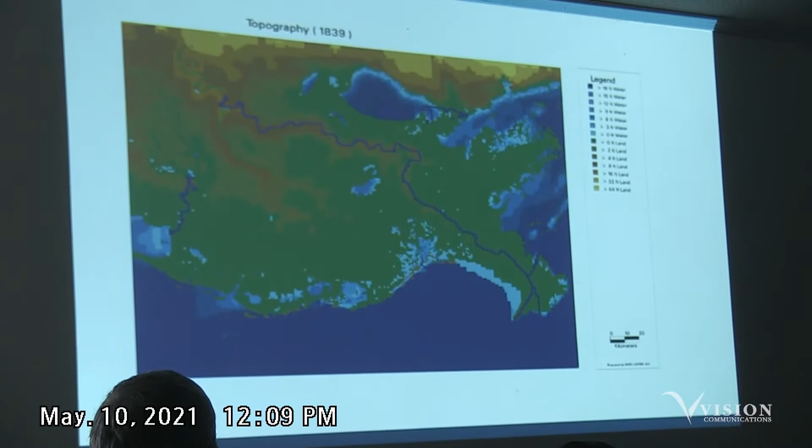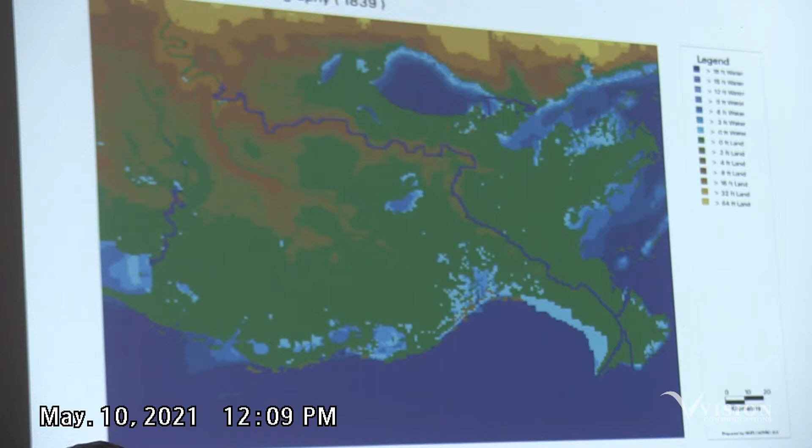Just to kind of refresh how bad things are, I got Joseph Hayter years ago to digitize a state map, and this was the 1839 state map, digitized like we digitize a map today. These are the days, 1839, when the river was still overflowing its banks a lot. You can see marsh almost all the way to Ile de Yan in Terrebonne Parish, solid marsh to the Timbalier Islands, and then almost solid marsh to the back of Grand Isle. And Plaquemines Parish was a real thick parish.

I mean, as bad as that looks, comparing the two, on the ground it's even worse. That's the kind of change. And look, just the change since 1950 is amazing. People, we're kind of used to it, that's why we don't notice how bad it is. But our land is changing. What it takes other places 1,000 years, we're getting into it in 100 years.

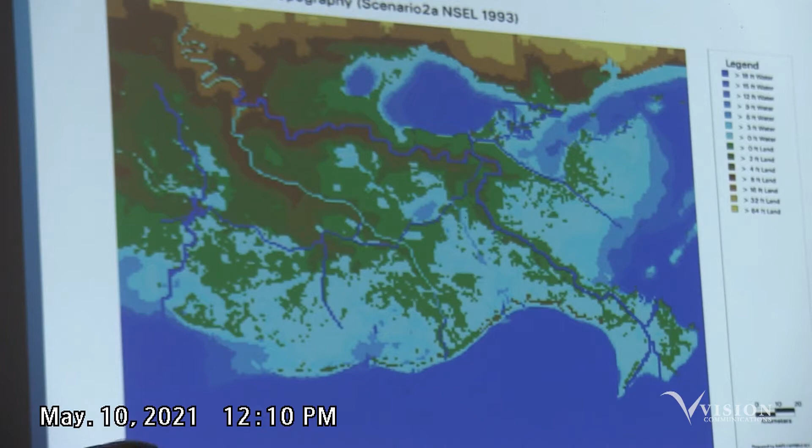And that's why the work that we do, and why we got to stay ahead and pay attention. The communities in South Louisiana, if they're gonna have a future, you have to will it. You gotta work at it. If you just are passive, your community doesn't survive. And you can look at the situation that Leeville's in and the comparison to where we are. Without a levee, we look like Leeville. If Leeville had a levee, it would look like us. So that's just a message that we gotta keep telling everybody.

And here's kind of closer reality, we used to be surrounded by marsh, and now the Gulf of Mexico is almost at our edge. That's why we got to keep on fighting, and we're fighting. But there's still some new land being built in the Atchafalaya Basin. Grand Lake used to be a lake, and now it's just the Atchafalaya River. Little Lake used to be little, and now it's Grand. And it shows the forces and what built South Louisiana, and why it continues to be a risk to us, and why we got to keep on working the way we work.

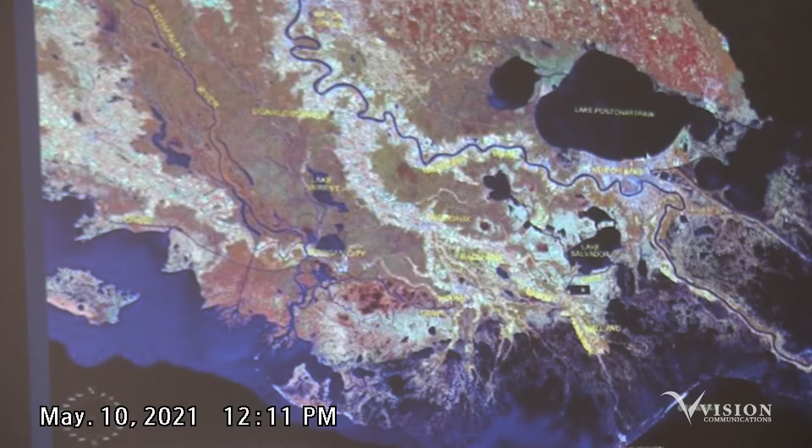And of course, maintaining our system, I've showed you this before, but the gates being back in place, full operational, lock again, and dependable. The problem's taken care of. We can grease it good. We know it's going to operate well.

Joe, Ben, any comments since we've had the gates in? Everything like it's supposed to be? Yeah, I mean, they've been going back and forth, adjusting the cables and making some slight adjustments, but it seems like everything's working correct. That's fine, good.

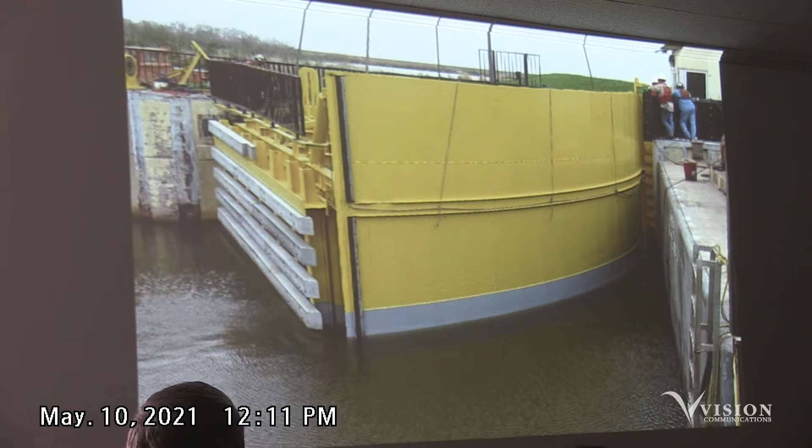It's just when you get those heavy rains, and again, it's one of those situations where it's better to be lucky than good. But again, we have a good system, but when you get more than you can handle, the rain is going to stack up. And again, I hope we don't see this for another 20 to 40 years.

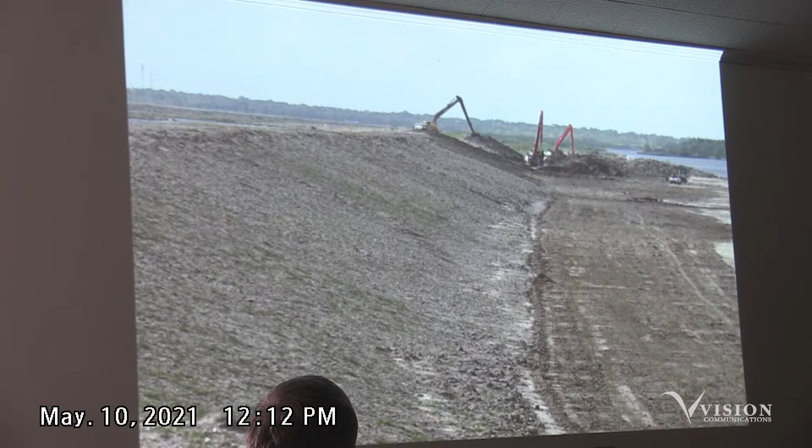Continue work on the levee. We're getting on the west side from Bully Camp toward the back area of Paul's Forum. We're getting that up to 18 feet. That's a tremendous improvement that's going on. Again, the marsh work that we had done, that used to be mostly open marsh. That was a trenasse that came all the way to the edge of the levee. We put a pipe down with slurry, a pipeline, about 200 yards from here, and actually had enough stuff drift over and close the trenasse.

And what you got, $300 million credit, Mitch? So far. Yeah, and so we get some more because it's so good. And then the key things kind of going on.

The biggest thing to really make a big difference for the whole area is to have a floodgate on the Intracoastal canal on the east side of our system, and tie in our system to the Morganza system. That way, if you get a storm, they'll shut that gate, and we'll have a lot less to worry about along the Intracoastal canal, a tremendous help to North Lafourche and Terrebonne from flooding on this side. Past the Intracoastal north, that goes into North Lafourche, and they handle that part. But over here, Terrebonne is handling the cost, with some help from North Lafourche.

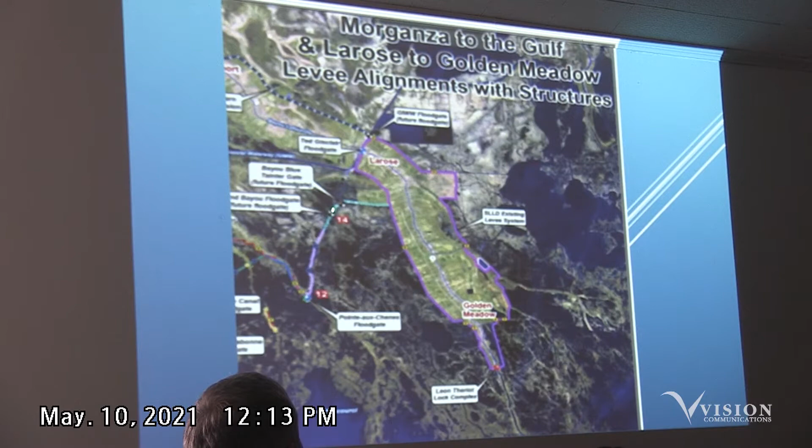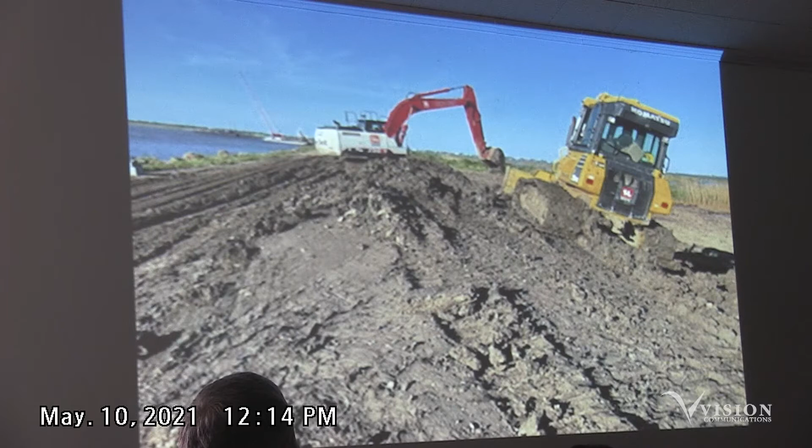Then here's the Pointe-aux-Chenes floodgate, the southernmost area connected to section K that we're building, with Terrebonne, North Lafourche and the state providing funding to get it done. Our mitigation levee was here, 4 to 5 feet, and now it's really turning into real levees. There's real progress going on there.

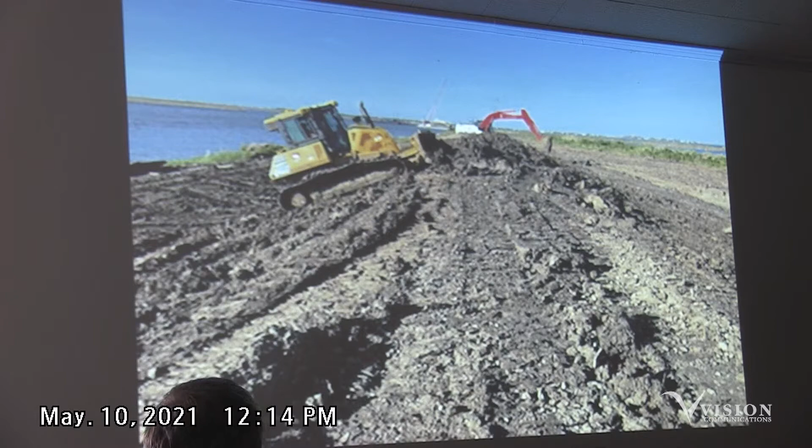What is it, 1.6 million cubic yards that we dug out the Grand Bayou? Yep. And pretty soon we'll talk about getting another 700,000 cubic yards. This levee is going to be substantial in not too long, but it's substantial now. The progress is taking place.

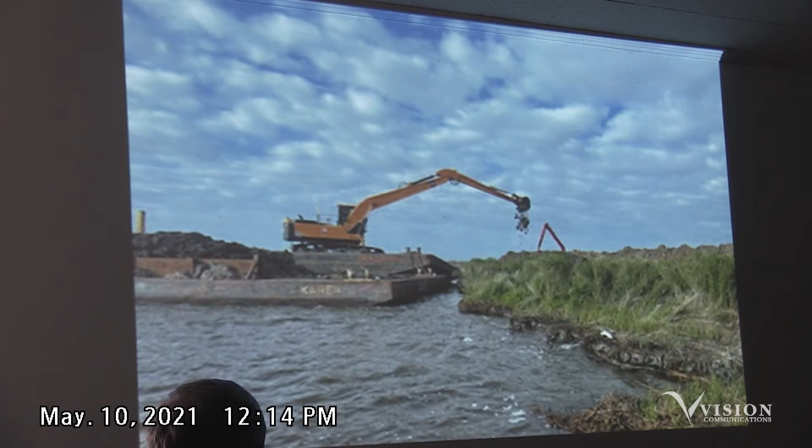This is some FEMA dirt. Some of the dirt was washed away by, which storm was it? Barry? Barry washed it away. FEMA's paying for it and bringing it in by barge, and some of it's being trucked in. But all of this is helping to get the low areas. There's a few low areas. A lot of the levees are up to 8 to 10 feet. But hitting the low areas is what matters, as always, you judge your protection on your lowest spot, because that's where the hole in the system is.

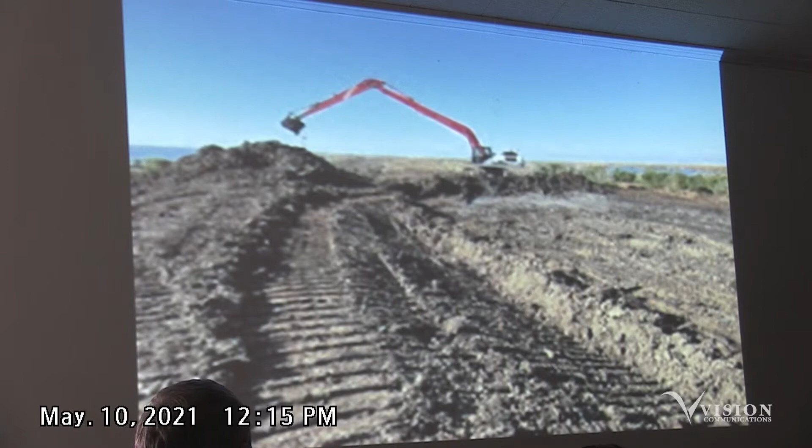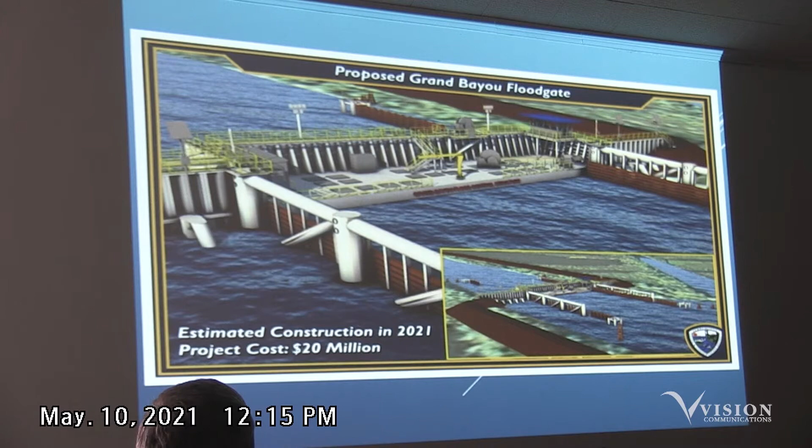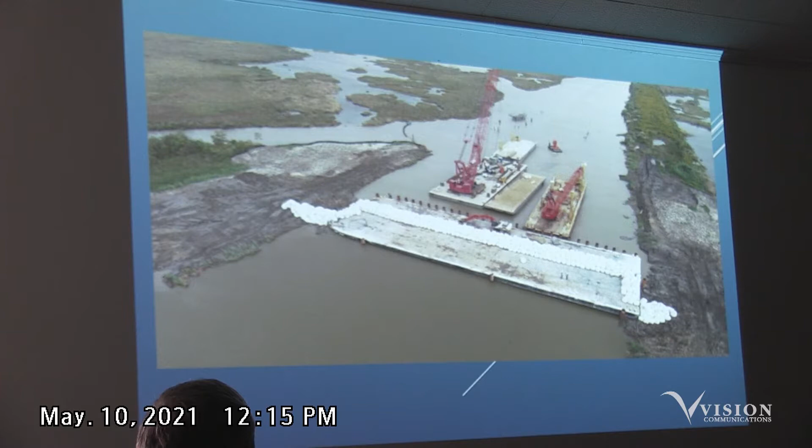They're taking care of the low spots, and there's going to be really good improvements for this year. Again, the Grand Bayou floodgate is on schedule to be in place and useful by August of this year, right when you start getting the heart of hurricane season. So with the improvement on K, and with the floodgate going in—this was a temporary structure that was there that helped keep some water out, and the more water coming, the more it kept out. But it did its job.

Now the work in Golden Meadow—this is the wall at the Golden Meadow pump station. It was at 13, and now it's getting close to completion at 17-foot elevation. That's a tremendous improvement in our flood protection here by going from 13 to 17. Our levees in Golden Meadow are between 17 and 18. So getting that gap closed, and even if it's slightly over top, it's a strong structure and can stand some overtopping. But getting to 17 would really reduce the odds of being overtopped.

And then, you look across Yankee Canal, how close the water is once you get past on the other side of our levee.

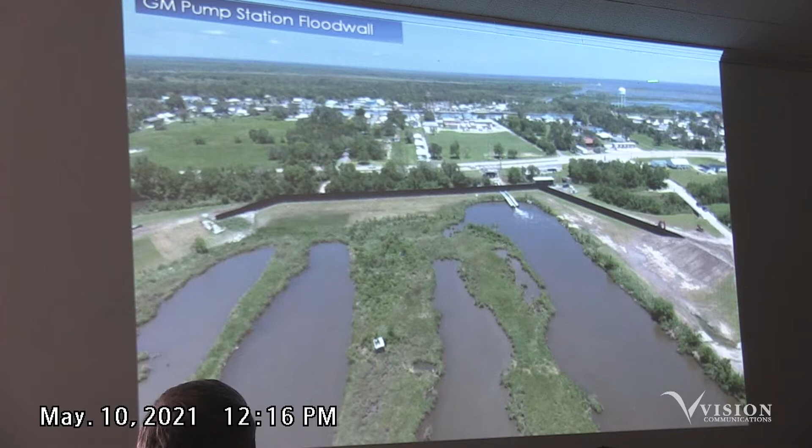Okay, here we look north, same wall, here's the Golden Meadow pump station. Remember, the 4-lane highway, you drive on it, you think you're on high and dry land. Well, it's dry, but it's not high. That roadway is below sea level in a lot of places in Golden Meadow. And then you see again, that don't look like 1950.

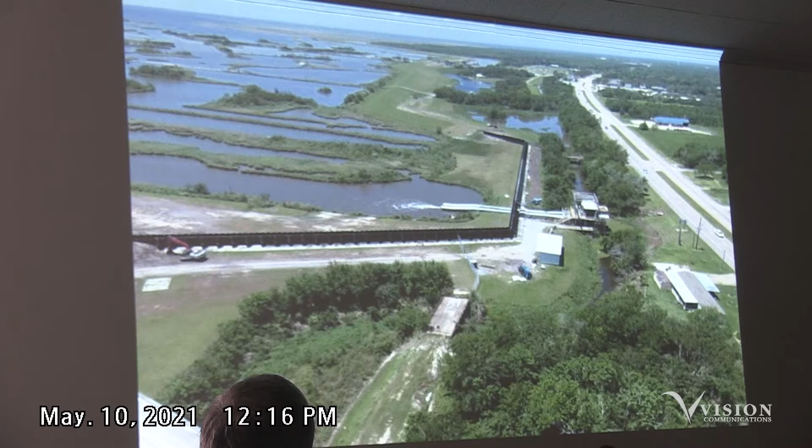You're still losing the marsh, and water gets closer to us. And then here we are looking west. There's a 4-lane looking west toward Terrebonne Parish, and Catfish Lake has broken out of its boundaries, and that's why we have to ensure that we keep these levees as high as we can and as strong as we can.

And now we're looking south. There's a 4-lane, there's the Golden Meadow pump station, the improved wall. The town maintains the water in the Borrow Canal at -9. We keep ours at -7. But that's at a -9, and over here's a +1. So every day you've got a 10-foot differential from the outside of the system to the inside of the system at Golden Meadow. And again, the road over here is not much above 1, if it is above 1.

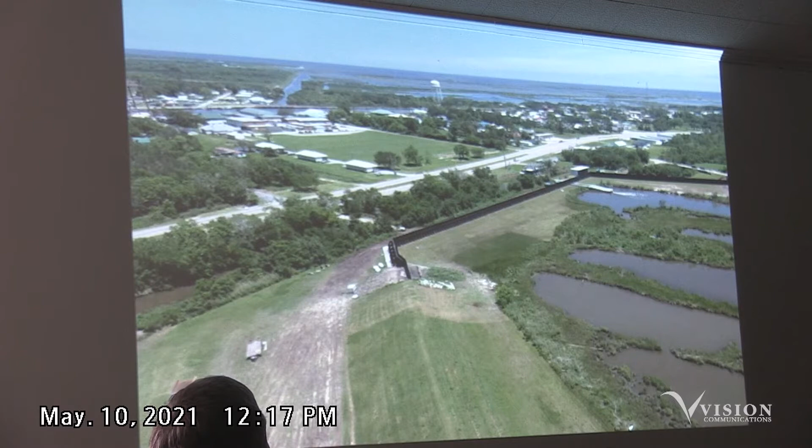There's a different view looking southwest, again, to that big open area on the 308 side when you get past Yankee Canal.

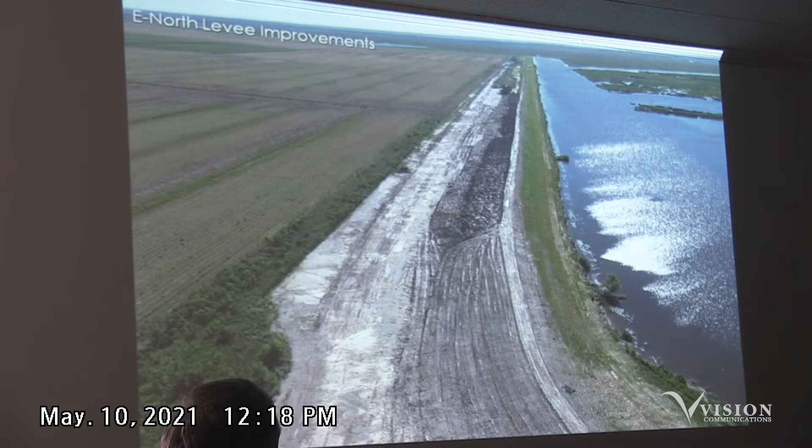Here's the work on E-North. We've talked to the state, and they've allowed us to enclose more of E-North and raise the levee to about 14.5 feet. We had dropped below 13, and so we're bringing it back up. This is working out real well.

Here's Superior Dock. We were supposed to stop here, but because the cost is working out well and we have some state money through GOMESA, we're going to continue to the corner and try to get all the way to the boat launch. If we do that, we can really improve the flood protection in this area a lot, which protects the whole system.

The land here is at -9 inside the farm. There are places down to -9, and we're getting this up to about 14.5 foot elevation. There's Superior Dock, and we've been delivering the dirt here to this corner, and then we'll proceed to the other corner.

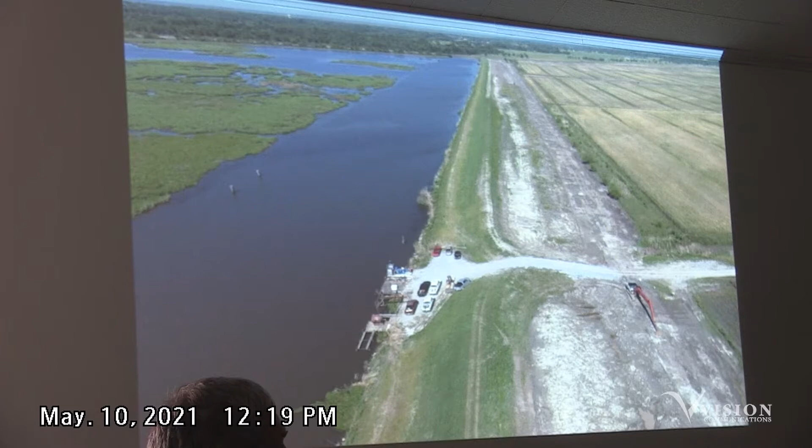Again, Superior Dock looking west now, and this is the corner that meets with East-South. This is Clovelly, and East-South goes from Clovelly to Breton Canal. Dirt was placed, and our machines are helping shape it into a levee and bring it up to 14.5 feet.

This is not good when you have an acute angle. During a hurricane, I believe it was Rita, the water was 3 feet higher in this corner compared to when you got away from the corner. You can see the debris line kind of go up. So we've always tried to build this up 3 feet higher than the surrounding levees in this area.

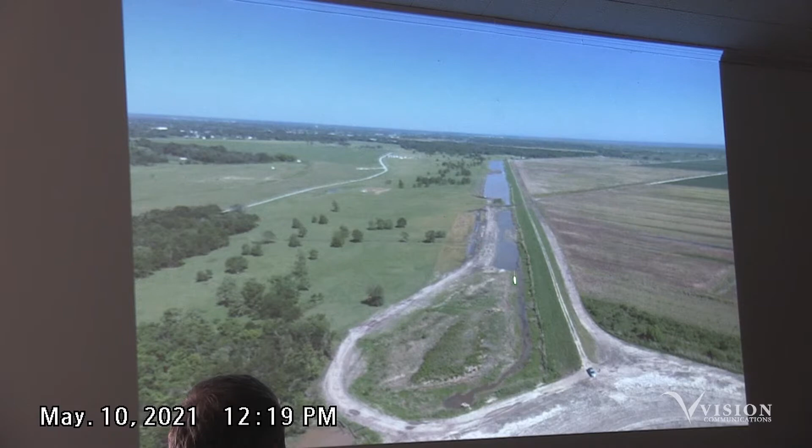Here's the pit that was donated by the Scully people. They allowed us to expand their canal so they can fit out, and that's where we're getting the dirt for the project. This is East-South, Scully and Clovelly going toward Breton Canal.

This had dropped below 13 feet. I mentioned 13 feet because that's the level the levee has to be for us to get the benefits of our flood insurance, so we're making sure to maintain above that level.

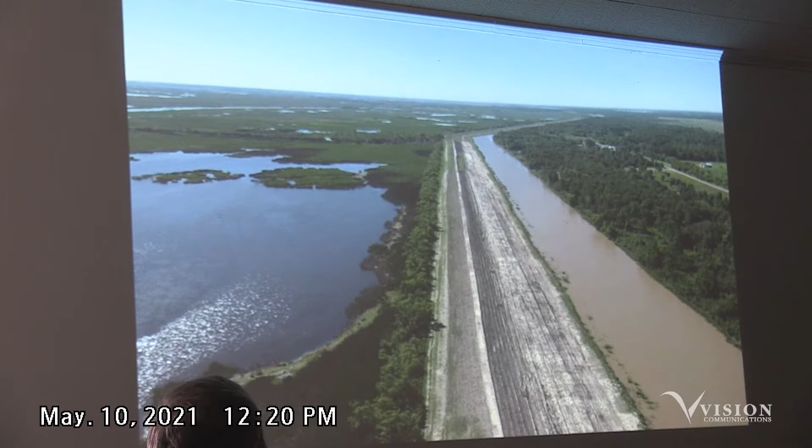And that's that angle I'm talking about. We had actually approached the Corps and said, look guys, how about we just jump across from this point, somewhere, and connect over here at Superior Dock? Then you don't have this acute angle at all. The Corps at that time didn't do it. Now after Katrina, they don't let these angles take place. But as I said, it's one of the cases where to be obtuse is actually to improve your situation rather than to be acute.

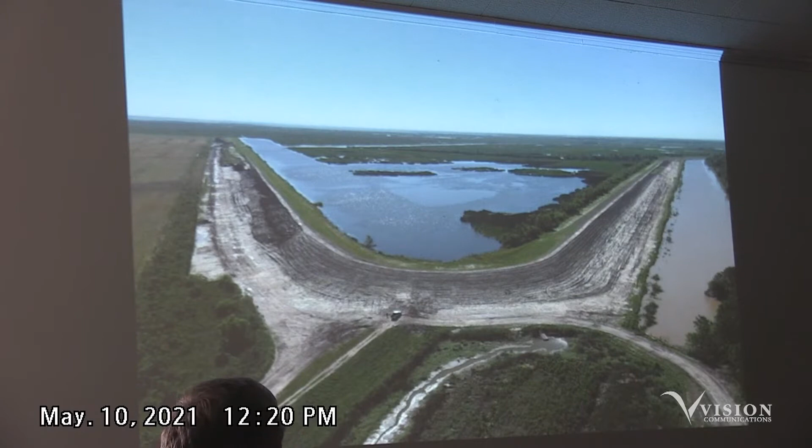On the west side, this is section F. We had parts of this levee which was 13 feet. This is from Scully all the way to Delta Farms Road. Some of this has subsided below 13 feet, so we're bringing that back up to about 14.5.

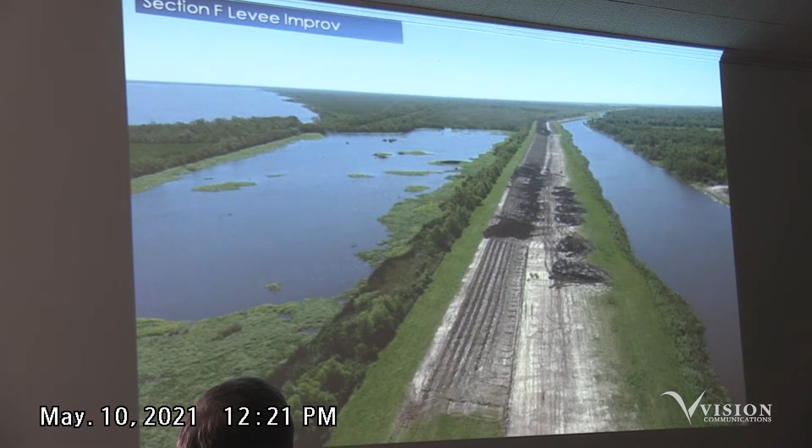They're trucking in this job. In this area, we have some good fresh marsh and not having the erosion problem that we have on the lower area and also on the west side. This is progressing pretty good.

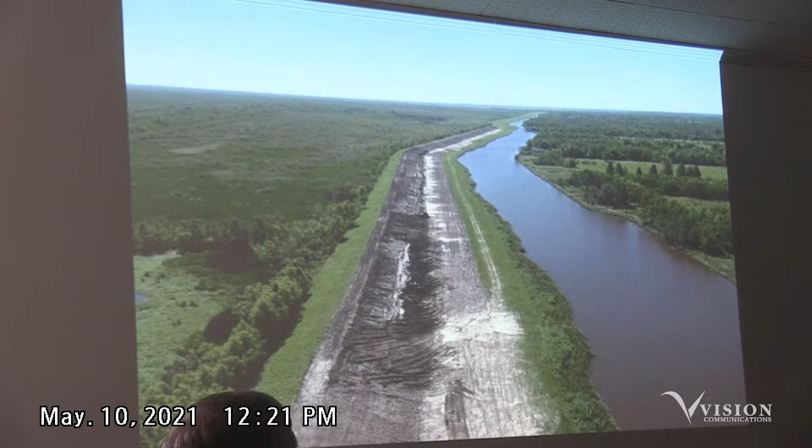When do we think we have this finished? Sometime next year. Early January, you think? Sometime after the first of the year, yeah. After the first, okay. But again, it's a big building.

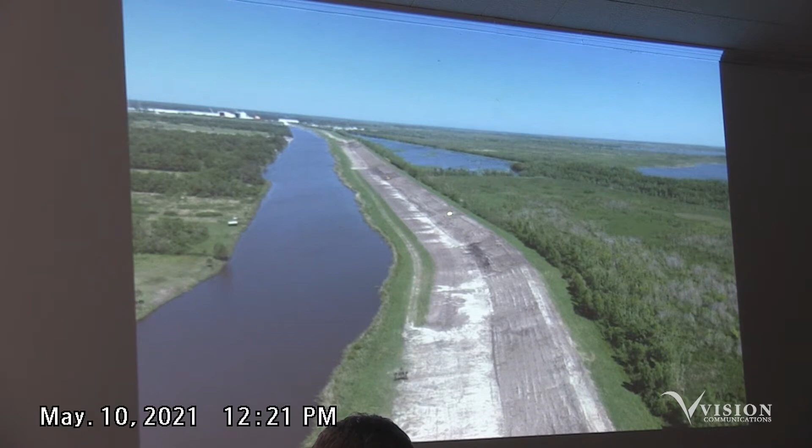Here we are looking north toward Delta Farms Road, and again, getting the elevation up to about 14.5.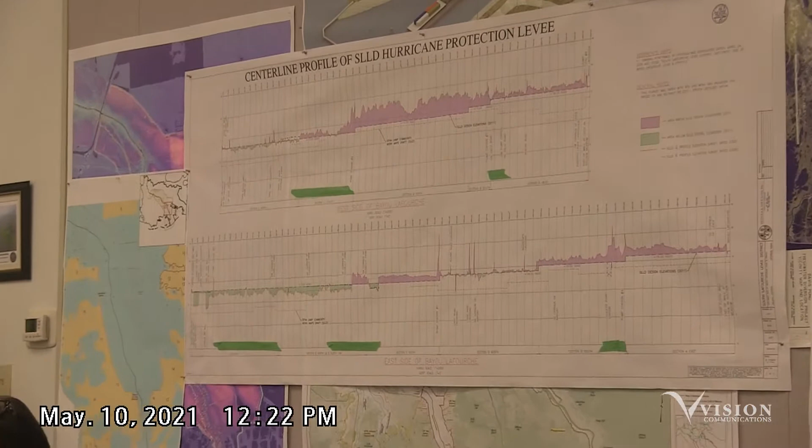We're taking care of a lot of areas - if you look up on this graph here, I just put these kind of rough areas in green. All of these areas are being worked on right now to raise those levels up. So there's a lot of linear feet being elevated still, and we're going to keep doing that into the next 2-3 years.

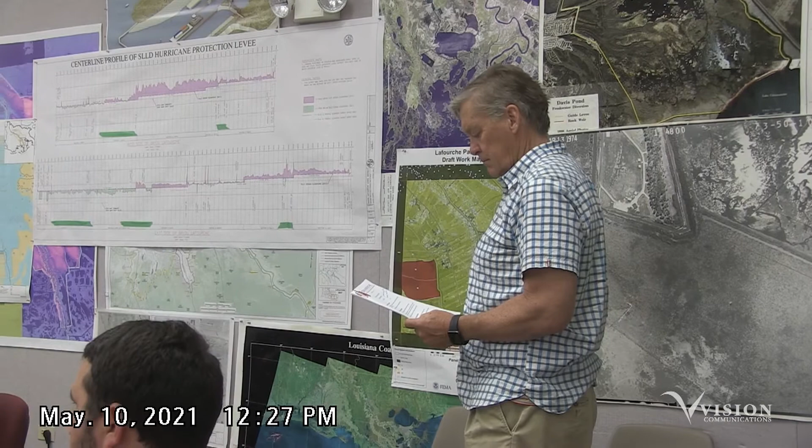He has pay application number 12 on the agenda in the amount of $32,459.37, and we do recommend you approve that. Okay, you have a recommendation of engineers to pay request number 12 in that amount for Grand Isle Shipyard. Your wishes, gentlemen. Moved by Monty, second by Rich. Any discussion? All in favor, signify by saying aye. Aye. Opposed, no.

On D-South levee improvements, SBL is the contractor. We do have a clear lien certificate, which clears out the job. The job is complete. We have change order number 2, which is the balancing of final contract quantities, a deduction of $315,920.39, and an additional 140 days of contract time to bring him up to when he actually finished this part of the job. We do recommend you approve that.

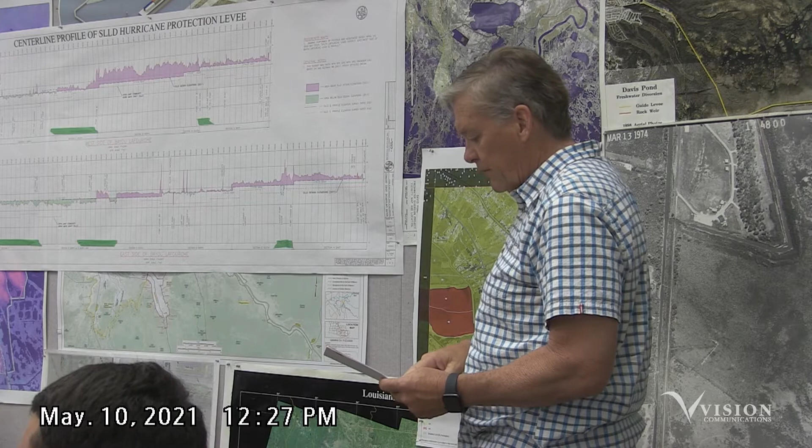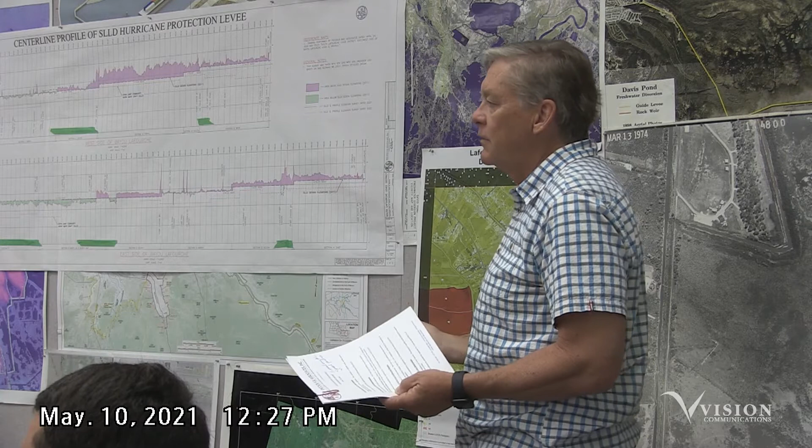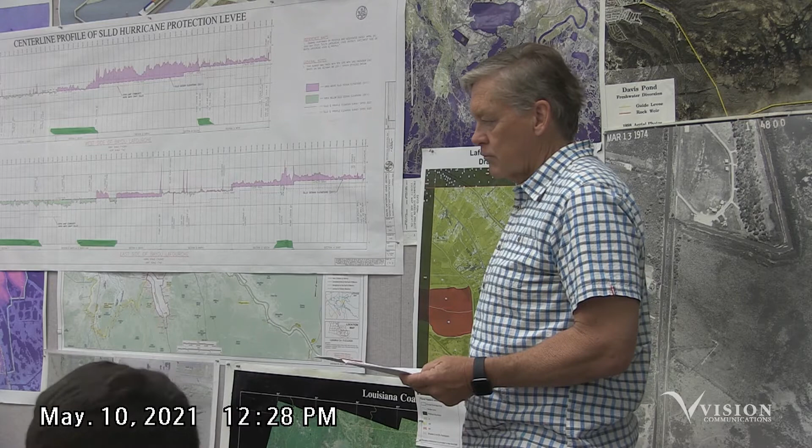Also, I think the attorney has a separate agreement that the levee district and SBL came to. I don't know if y'all want to take that up now. Yeah, this is the mutual release and settlement agreement. Ray has not completed it, but we would like for the board to give Ronald the right, upon his approval, to get that done so we don't have to wait till the next board meeting. Y'all okay with that? Okay, gentlemen, you've heard a recommendation by the engineers and our general manager.

We paid pay request number 13 in the amount of $13,329.05, and signed the final agreement, including change order number 2. Moved by Monty, seconded by Mac. Any discussion? All in favor, signify by saying aye. Opposed, no. Motion carries.

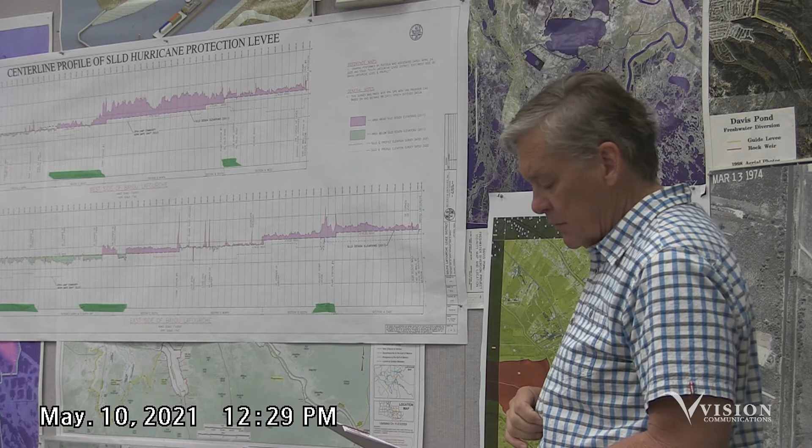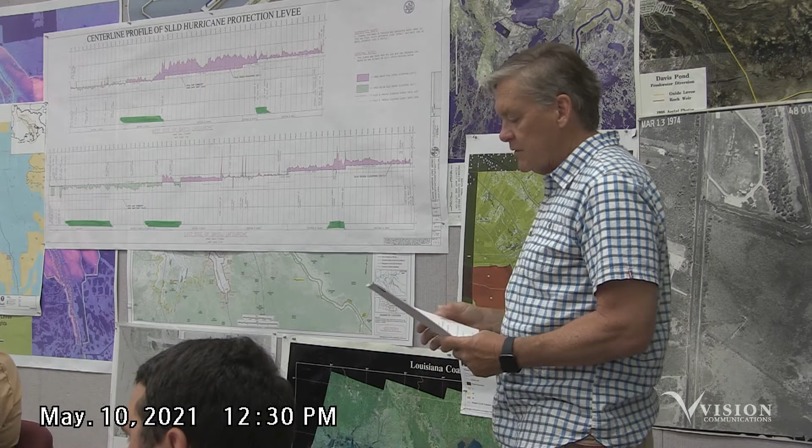On section F, that project runs from the Clovelly Levee all the way to Delta Farms Road. The contractor is Onshore Materials. This is an off-site borrow — he's taking material out of a pit he bought and hauling it onto the levee section to elevate it. He's making decent progress; even when the weather's bad, he's hauling as much as he can. Pay application number 3 is on the agenda in the amount of $205,721.10. We recommend you approve that.

Change order number 1 and pay request number 3. Change order number 1 is for $189,089.23 with 25 additional working days. That's to add material to the two sections that are seeping, elevating the berm in those areas that Wendell talked about in the last meeting. So we're adding material to his contract to take care of those two areas.

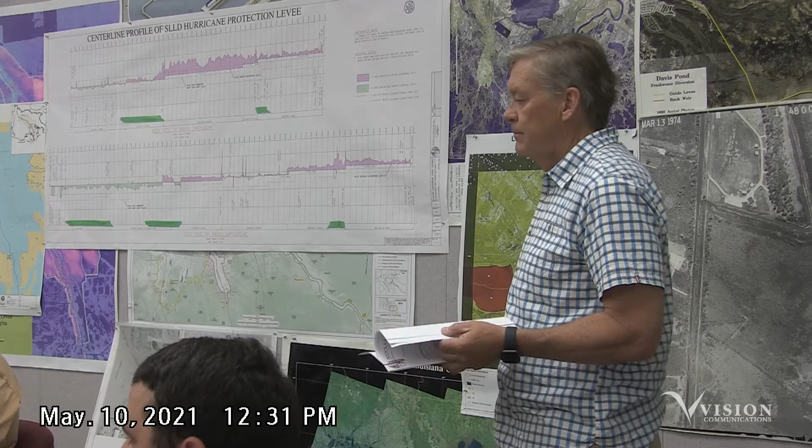You've heard the recommendation of our engineers for these two matters; we'll take them under one consideration, one vote: change order number 1 for $189,089.23 with an additional 25 working days, plus pay request number 3 in the amount of $205,721.10. Moved by Matt, second by Brett. Any discussion? All in favor, signify by saying aye. Opposed, no. Motion carries.

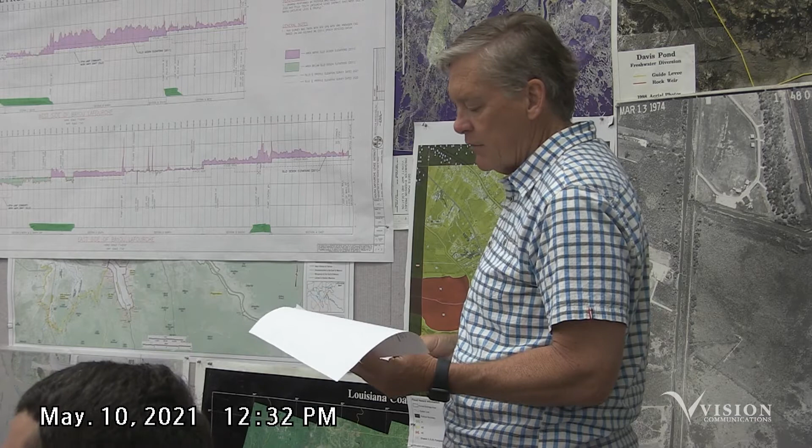On the Meta Pump Station flood wall, Sea Level Construction is the contractor. He's got a little bit left to paint and is working on the levee tie-ins on both ends. On the southern end, most of the dirt's in, and after that he'll put revetment mat on top of it. He's making big progress and should be close to finished by next Monday. We have pay application number 7 in the amount of $37,561.06, and we recommend you pay that.

You've heard the recommendation of engineers to pay Sea Level pay request number 7 in the amount of $37,561.06. Moved by Roland, second by Keith. Any discussion? All in favor, signify by saying aye. Opposed, no. Motion carries.

On the maintenance of the South Floodgate, Circle LLC is the contractor. He's in the lien period, the job's finished. We've had him out a couple of times to adjust things, but we don't have a pay application this month. Next month we'll have retainage.

Wendell also wanted me to talk about the Larose Lock project. We've been working on our design, probably close to 90% done. Our goal is to have all design documents complete by the end of this month. We did submit for a permit with the Corps, and we already have a state permit. We're waiting because the Corps wants to review all of our design documents, so the plan is to get those documents into their hands by the end of this month.

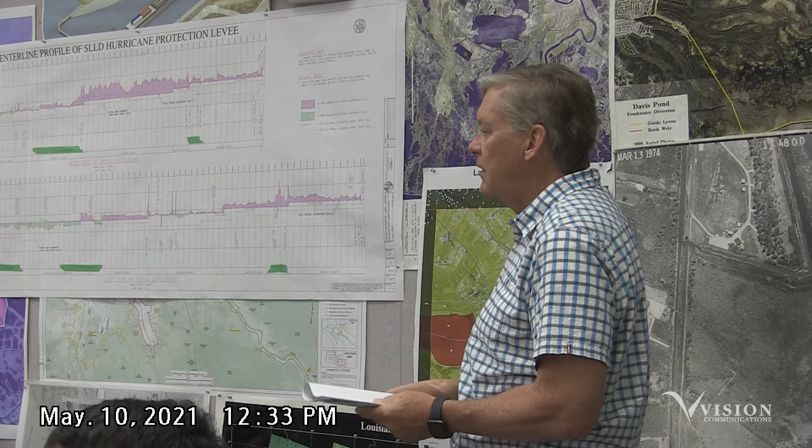We do have some money from the parish in the form of GOMESA bonding, and their stipulation is that the money be spent by 2022. So part of this will be paid through the Levee District's money, mostly BP settlement money and capital outlay money, along with the parish's GOMESA bonding.

We've also applied for a watershed initiative grant from the state, and Wendell's been working those inroads in Baton Rouge trying to get us some money out of that. We got tremendous cooperation from Archie Chaisson in the parish and Chett Chiasson with the Port Commission. Everybody's working real hard to try to get that done.

Again, tremendous benefit for keeping Golden Meadow dry and also keeping our boat industry working so they can get through the gates, get a lock, and get through like they do in Golden Meadow. We've had to stall boats in the roads because of high water, and that's happened several times over the last year. So it's a great benefit, that's why Archie and Chet are helping a lot with this.

These four sources total about 15 million. What do you anticipate the cost? We're trying to anticipate the cost will be 15 million.

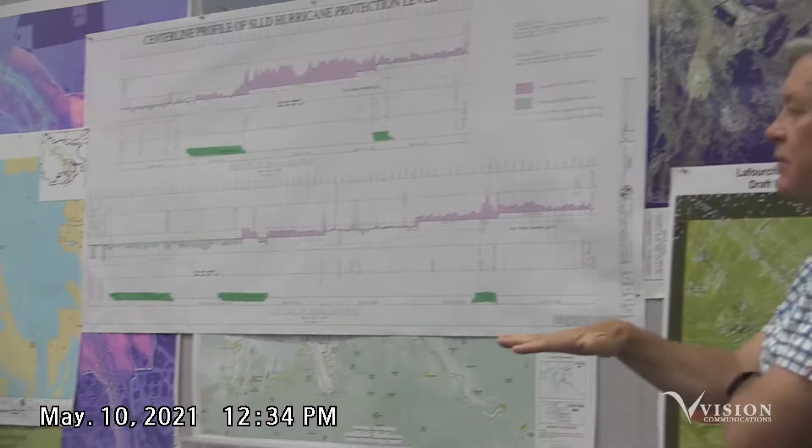So the general concept of the design is a float-in steel barge structure, similar to a dry dock, that you would sink down and it would sit on piles with a seepage wall that it seals to. In the future, you could potentially ballast it up, take it out again, and bring it to a shipyard to have it dry docked, so you can clean it and put it back in place.

That's opposed to Golden Meadow, which is the cement one, sunk in place and anchored permanently to the bottom. So the arrangement is that the barge is inside our protection system.

Our floodgate is on the outside, and we're gonna bring it through on the downside of the existing gate. So you would tie in with walls to the bank of the bayou. The bank on the bayou on both sides is at a +8, high enough to create the locking chamber that you need.

This would shut down the bayou transportation access for what period of time, you think? We're probably looking at a couple of weeks at a time. We'll probably have different closures for different processes - you're gonna have to drive sheet pile, drive the piles that support it. So it's gonna be an ongoing process, probably, so that companies can schedule their routes coming through here.

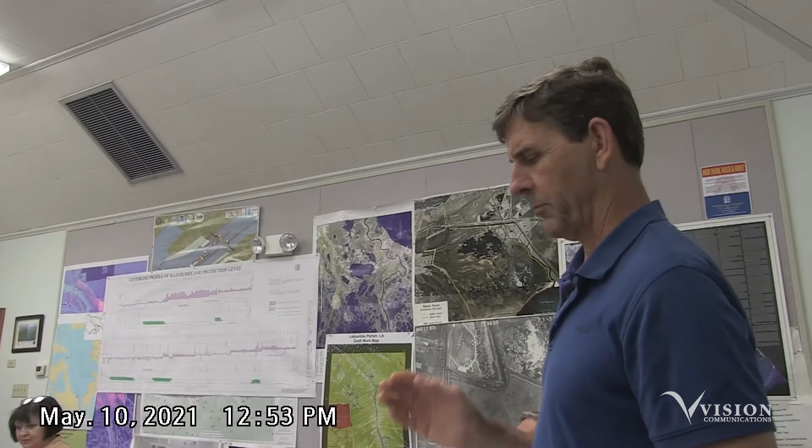Okay, all south, Stevie. So I've got a couple of Reach K projects to report on. Both of them are being done by Sea Level. The first one is the shaping contract, we call it. It's listed as phase 2 in your agenda.

Again, Sea Level has been out there shaping the spoil we put out a couple years ago. They've been out there shaping that for probably getting on 8 or 9 months now. They have shaped most of that existing material into a good looking levee. I know last month I shared y'all that we had taken a video of that and shared it with a few of y'all.

What they're doing under this shaping contract now is just shaping the dirt that we're having delivered under the next contract I'll talk to you about. So we basically have them out there shaping dirt as it's delivered by barge, the stuff that Wendell showed that's been made up from the loss of Hurricane Barry. That's really all the shaping that they're doing on this job.

We've got a change order in the project that we're requesting of $79,886.82. This change order is to keep them working for another 30 to 60 days.

As more material is delivered by barge, they just have to keep working it. I think this is going to go on for another two months at this time, weather dependent. So probably this change order, and perhaps another one, will keep them going until we finish delivering all the new dirt that we're going to bring to Reach K.

With that being said, we recommend approval of change order number 4 in the amount of $79,886.82. You've heard the recommendation of the engineers. Moved by Roden, second by Brian. Any discussion? All in favor signify by saying aye. Opposed, no. Motion carries.

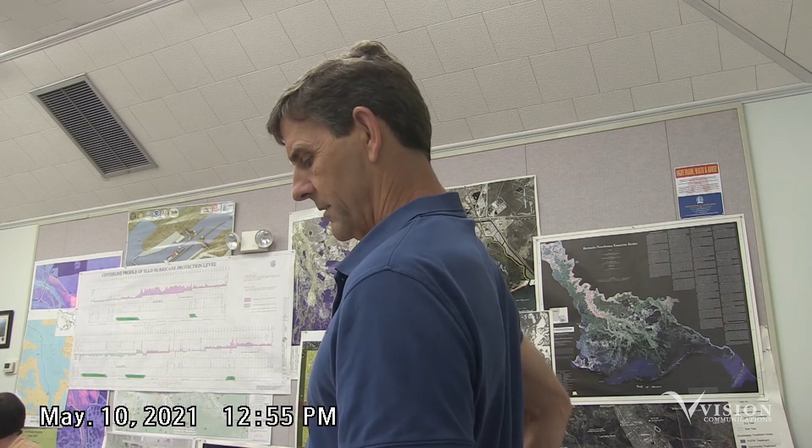The other action item we have is payout number 7 in the amount of $69,613.62, which we recommend approval of, Mr. Chairman. The $79,800 was for future work; this payout is for work already done.

You've heard the recommendation of the engineers to pay request number 7 in the amount of $69,613.62. Moved by Monty, second by Mac. Any discussion? All in favor signify by saying aye. Opposed, no.

The second contract on the agenda is the delivery of material. This contract is to deliver about 67,000 yards of material. They've delivered right at 41 or 42,000 yards so far. A good bit of it has already been delivered on the southern end by truck, and we still have a bunch of barge delivery to do up on the northern end.

They're coming out of the Tomplay property at the north. Again, this is all very weather dependent, and the last 30 days have been pretty wet, so when it's dry they make good progress, and when it's wet they have to shut down for a few days.

If those of you haven't been out there, they've really done some good work. We're focusing this dirt delivery on the areas where we ended up with low spots after our first project. We're trying to bring in dirt from outside to get this area up to at least an 8 consistently throughout Reach K. In many areas we'll be at 10s, and perhaps even 12s, but we'll have a minimum of 8 all the way throughout Reach K.